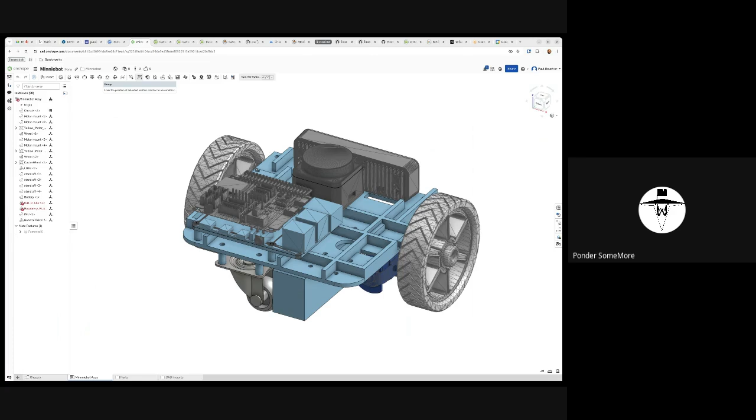Paul, do you have anything to announce about the monthly meeting and voting and all that kind of stuff, or has that already been taken care of? Yeah, sure, thanks Kareem. Yeah, let me do that.

So the DPRG annual... oh yeah, there's lots of stuff there. Okay, thank you, Kareem. My computer is going so slowly at the moment.

So the monthly meeting will be on the 4th Saturday of this month, which is the 25th. So it's not this Saturday, but the following Saturday.

It's the annual members meeting, and it's where we will vote in the board members. We do have a slate of board members. So I'm running again for president. Carl is willing to stand again for vice president. Doug for secretary. Steve for treasurer, and John for librarian.

So the meeting will start at 10 o'clock Central, or 10:15, give or take. And the president for the last year, myself, will give a summary of the things that we did this last year, which was a lot. I was tallying it all up, and we really swung right back into it this past year.

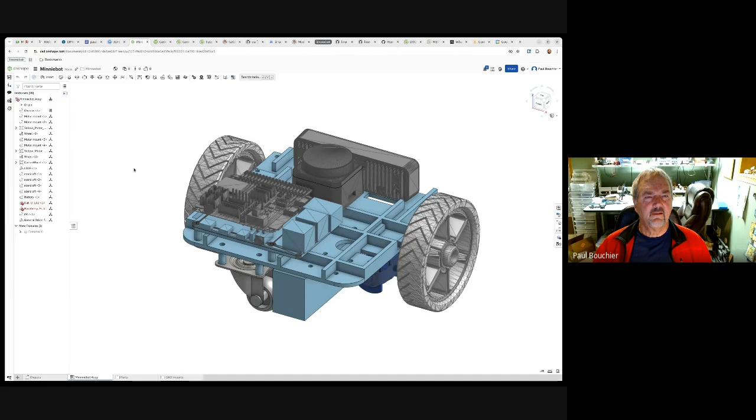Rolling over to Minniebot. Are you all seeing Minniebot here? Yes, seeing your drawing, your model.

I was very fortunate to be the beneficiary of a design review with Doug and Kareem, and they spotted lots of things that I didn't know about and were missing in the design. I've made a bunch of changes since last week, among them putting in a bunch of stiffeners. I think I might have gone a bit overboard here, but it's fairly sturdy, and it's got a Raspberry Pi underneath a Waveshare general driver board for robots.

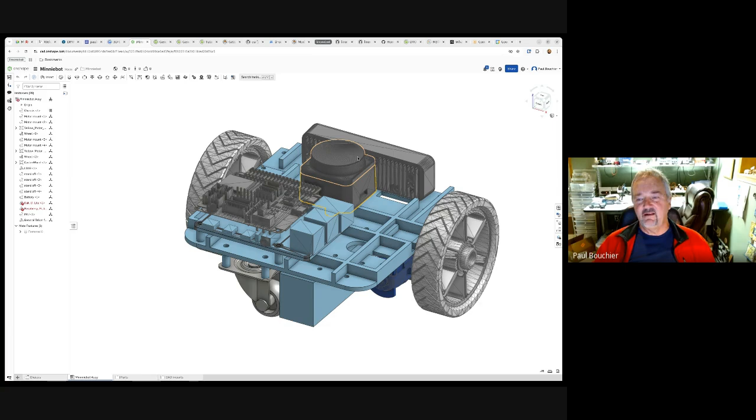It sits behind a spinning LiDAR, which actually doesn't spin on the outside. The spinning bit is inside behind a window, and there's an Oak-D Lite on the front. The big advance for me was - is that a battery box on the bottom? Yep, battery box on the bottom. Good, keep the weight down low.

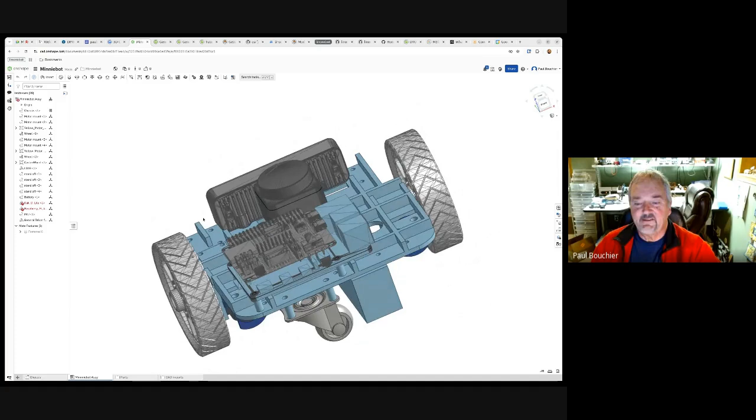Yeah, it's actually got a ton of weight down the back. The caster is actually off-center to make room, because the battery is kind of long, and I couldn't find any other place to put it other than down at the bottom, where it wouldn't impede access to the Raspberry Pi.

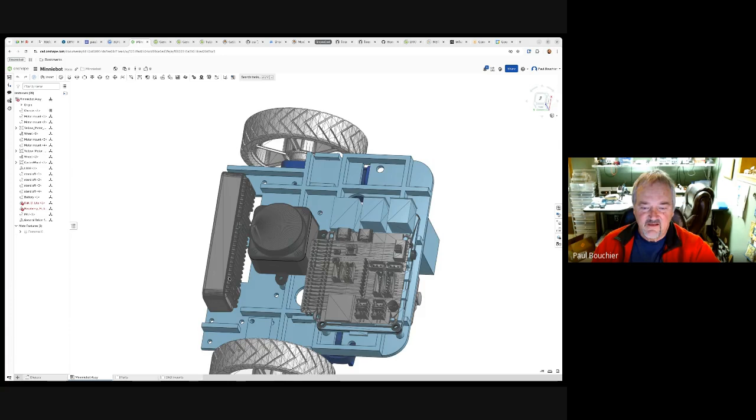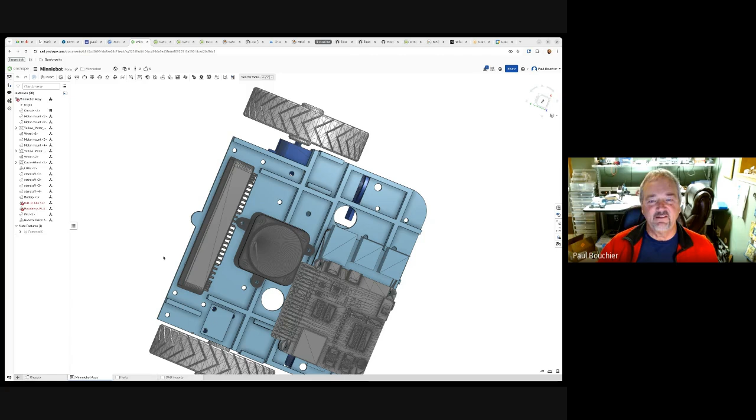And then the IMU is down on the left front, to the left of the LiDAR. Doug had a neat tip - he said put a centering knob on the front, and then you can put different sensor bars or bumpers or other things that would center themselves on that bump. You'd bolt it on here and on a matching hole on the missing panel, because I forgot to extrude this one corner. So yeah, that's that.

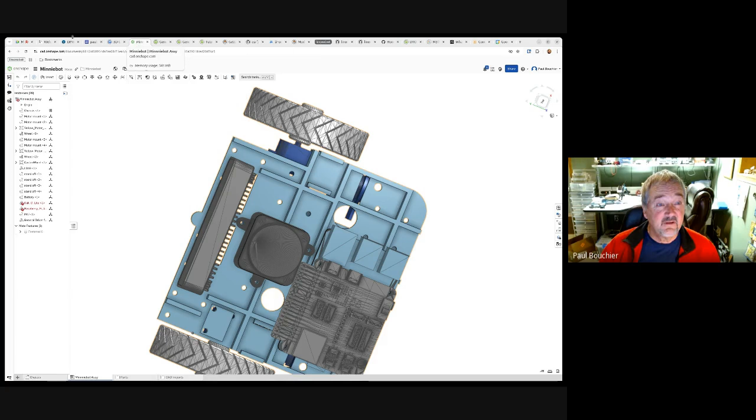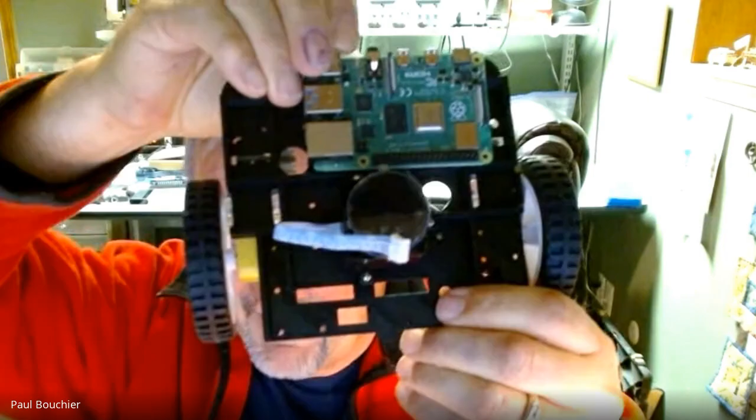So the big excitement is I printed that out and started assembling it. Rapid prototyping, yeah, right. I appreciate your tips on getting all this going, Kareem.

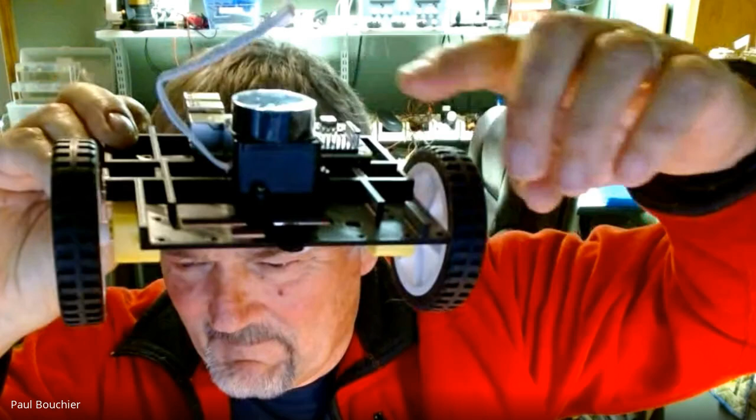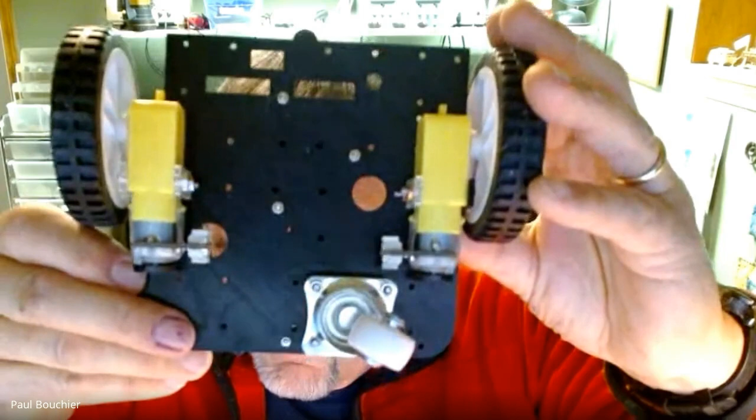And so this is a little LiDAR, a cute little LiDAR, no spinning thing - it's in behind this window. The Raspberry Pi is at the back, and the IMU will go up front here. The OAK-D Lite sits along the front here, and underneath, the battery will sit in this slot down here. So it's coming along, I'm very excited.

The WaveShare controller board arrives tomorrow. So I've had the motors and wheels spinning, and they ran. Hopefully I'll get some more stuff going. I did try to get micro-ROS so that they run.

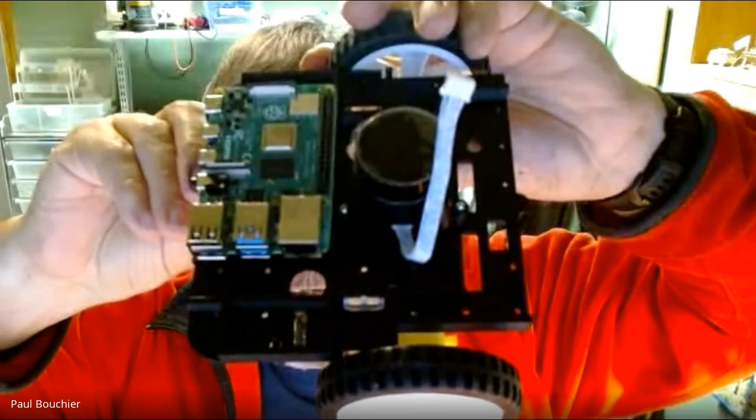This is intended to be part of an instance of Lino Robot. Lino Robot is a micro-ROS based system that runs ROS2 on a Raspberry Pi or a PC, and micro-ROS under Arduino on an ESP32 that sits on top of the Raspberry Pi, and it's supposed to be capable of SLAM. My real major goal here is to get the robot running that stack and able to run SLAM, to where I can make it run around a room or set of rooms and map them, and then use the map to tell it to navigate between rooms.

So it's all fairly black box stuff to me. I hope it's going to work, because I don't really know how to debug this stuff or how it really works in its guts, but we'll see. So that's progress on MiniBot.

If no one has any questions - Tom, do you want to tell us where you've gotten to? Because you've been doing some pretty advanced stuff. So, Paul, are you the one designing just the 3D version, and what about the firmware design?

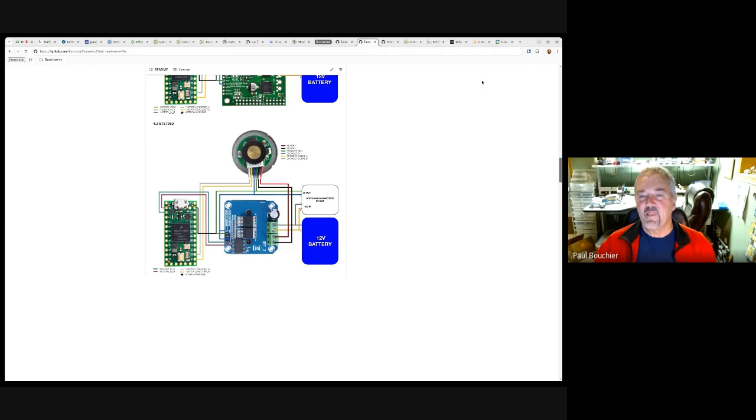The other site, Lino Robot Hardware, is for what runs on the microcontroller. They have a list of supported motor driver types, IMU, and how to wire it. In particular, they only support the Teensy, so a guy called Thomas Chu, who hangs out in the personal robotics Discord server, has ported the Lino Robot hardware repo to support the ESP32. I've been going down through his code.

I was trying this morning to get MicroROS to talk to the MicroROS agent. So he builds the MicroROS agent, then you start it up, and supposedly I got this far. I got the screen output that said the MicroROS agent had started and created a topic and a publisher, and so all of that looked really promising, but I wasn't getting any data out of the nodes. So there's further work to do on that.

He also supports and recommends Jazzy, that's Ubuntu 2404 with ROS2 Jazzy. I'm currently on Ubuntu 2204 with ROS2 Humble, so I might be behind the power curve on this. My hope is to blaze this trail and find out if the documentation is correct, if this stuff really works, and if you can reasonably easily build yourself a little two-wheel robot, such as I've just shown, and have it run around doing SLAM.

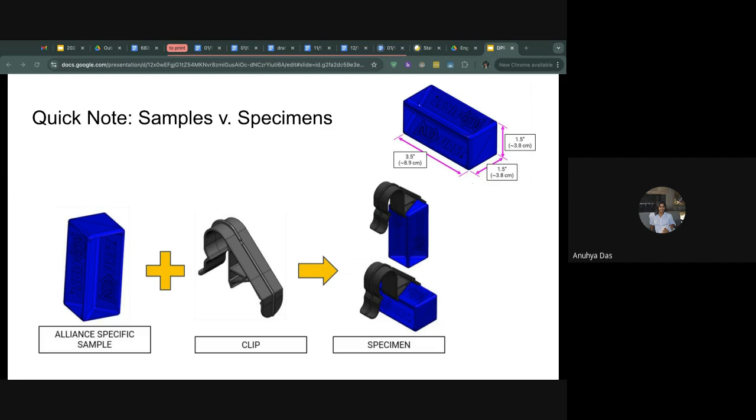One quick nuance is that once a sample has been turned into a specimen, it can no longer be used as a sample. So if a specimen is scored in a basket, it scores 0 points. It's basically a waste of a specimen.

Our goal is to reach in, grab a sample. We are only allowed to control one sample at a time. Grab a sample and then deposit it into the location it needs to go, which is generally going to be the buckets, or we're going to go to the observation zone where human players are waiting, ready for us with a specimen that we can grab with our robot.

That's just a quick game overview, and that's just to explain what the robot we're trying to design this year is for.

Now we're going to move on to our current robot progress. So this is the chassis of our robot from last year, and that has been repurposed for this year, because one of our main goals this year was to get a robot where we could get started with gameplay as soon as possible, since this year's game is significantly more focused on getting points than awards in a way that previous games haven't been.

So this is the chassis we're working with. It was designed for last year's game, which is why it looks kind of bulky. That's something we're trying to work on with the new chassis we're currently designing. However, it's fully functional — it has a Mecanum drivetrain, which our coders are very used to working with, which is one of the pros of having a chassis that's simple like this.

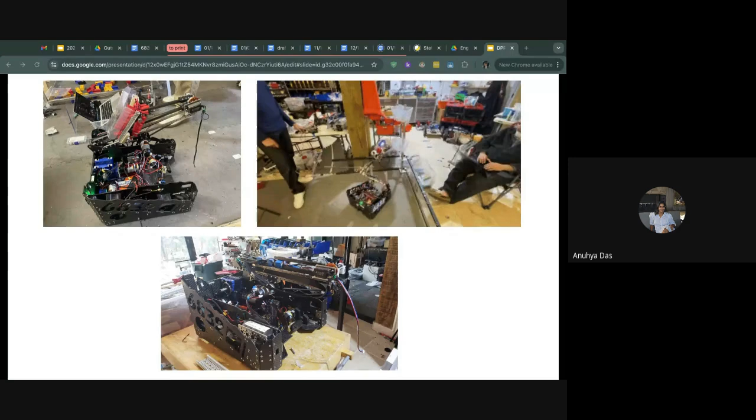And it's very large and bulky, and this is a game where we need to move relatively far. There are movement restrictions placed on us — we can't spread out as wide as we historically have liked to. So having a chassis that's basically built to be pretty stationary, with an arm primarily moving around, isn't the best idea for this year. We want a chassis that can basically zip around, and that's one of the things we're working on.

So this is the intake system, which you can kind of see in that little GIF there — the clear looking thing that's moving. This is how we're intaking samples. We realized that if we wanted to intake properly, we shouldn't just push the samples away from ourselves when we're inside the submersible. We want to pull as many samples towards us as possible. That's where the concept of raking in samples came from.

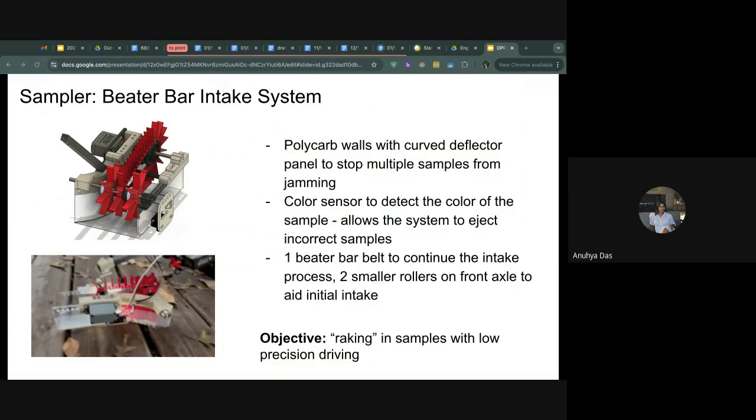Also, I just realized I have my camera off. I'm sorry. That's where the concept of raking in samples comes from.

So the sampler consists of polycarbonate walls with curved deflectors to stop multiple samples from jamming, because one issue we saw is that we were accidentally getting multiple samples stuck at the same time, so we couldn't control either of them, and that also gives us fouls since we're only allowed to control one sample at a time. There's also a color sensor, which allows us to detect which sample we want, because there are three different types of samples: red, blue, which are alliance specific, and a yellow neutral sample. We're trying to avoid capturing the samples of the opposite alliance, because once again, that will get us fouled.

So we started rushing into getting the next iteration of the sampler made. But because of the way it was constructed the first time, gaff tape was the only thing holding it together, and we wanted to get V4 out as soon as possible. That led to us making a lot of mistakes with version 4 of our sampler, because we knew what worked from the previous version, but since we were so busy trying to get a new version out, we kind of ignored all the on-robot testing we should have done.

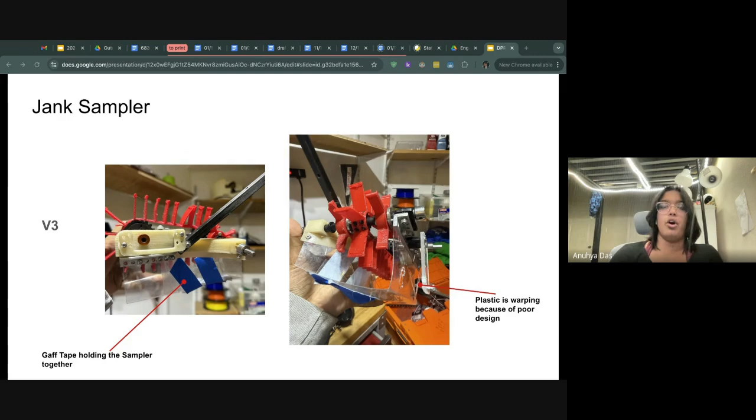Sorry, all the off-robot testing that we should have done. So in the process of making a more functional version, we rushed the assembly, and that led to even more issues in the long run.

Our beater bar was too stiff, so we ended up pushing samples into the ground instead of guiding them with a sampler, because we were having weird temperature issues on our 3D printer. And then the angle connecting the sampler and the carbon fiber tube that you can see there wasn't right.

It wasn't intaking samples properly, and it was putting a lot more stress on our coders. The color sensor was mounted too far from the wall, so once again, not very usable data from that. And the beater belt sprockets were not aligned properly, so they would basically fall off really regularly, making gameplay really unreliable.

So then we had to basically go back to the drawing board, see what we could figure out with this. And we decided to cut notches into the beater bar tines, which you can kind of see in that left picture. That makes them more flexible, so they can guide samples in more easily. So they're not just pushing the samples into the ground, they're actually guiding them into the sampler.

We realigned the color sensor, and we made the standoffs, which were acting as the color sensor mount, slightly shorter, so they were pressed up better against the polycarb. And we couldn't adjust the angle of the CF tube without printing a whole new part, and that's literally hours of printing and then reconstruction. So we decided to let the coders deal with it, basically.

So the lesson we learned was that testing off robots should be prioritized, because it helps us more in the long run, even if it feels like it's going to take more time.

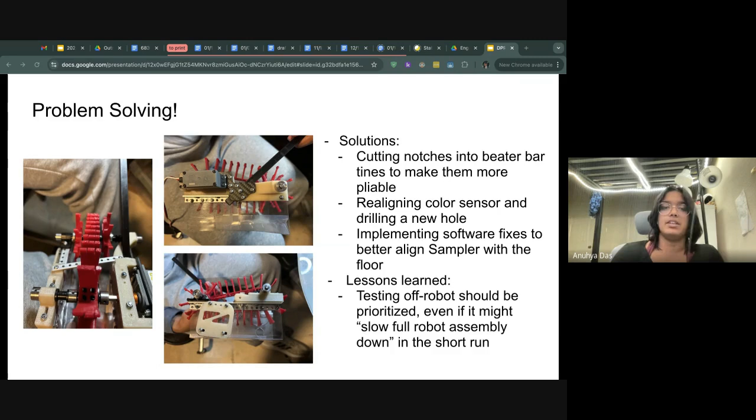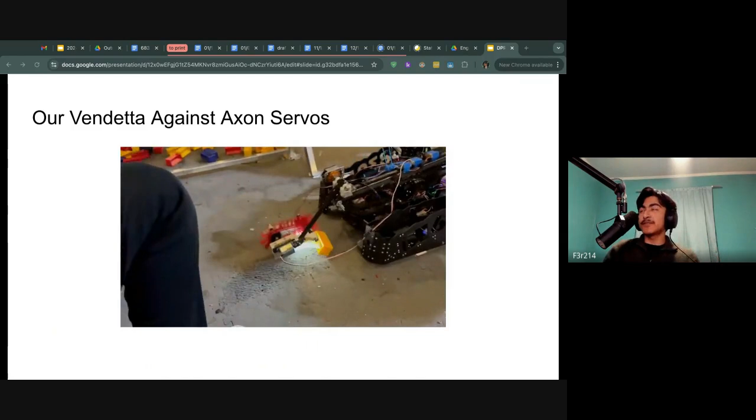Yes, so this is the moment where there's this brand of servos, Axon. They're pretty expensive, but high torque. We have a record of breaking them in past years, and here's the first one we caught live on video. So basically, when the arm was moving back, it got caught on the floor, and then we overstrained it. And there goes, I think, $50.

But an upside to this, those are 85. Expensive servos. 85.

But there was an upside to this. Since we've been very proficient at breaking servos, we've also gotten a little better at fixing our robot. I think this took us 30 minutes to get the servo off and then get a new one back on. And then this is a clip of the arm actually working after a while of it being messed up from all the previous jankiness. So that was pretty cool.

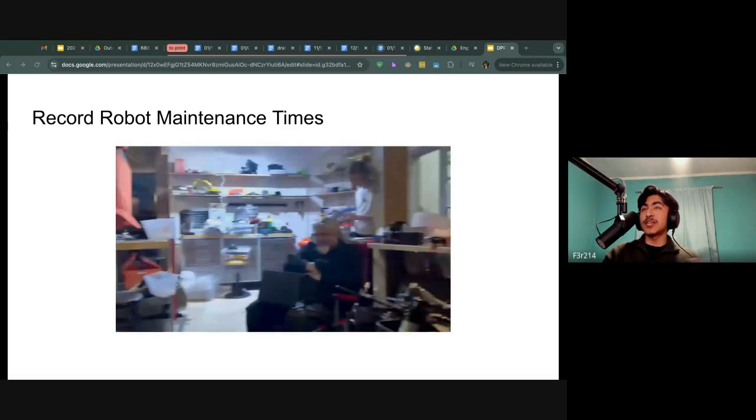And then for our current chassis, right now we have a single arm that is a 2-stage linear slide. I believe it extends to around 3 feet, and it's currently on a worm gear shoulder. However, initially we were planning on doing some kind of coaxial shoulder joint that would allow us to both extend the slides and also raise them up and down.

And then we're planning on adding a second linear slide arm so that we can have both a sampler and then another intake that we've been working on alongside it.

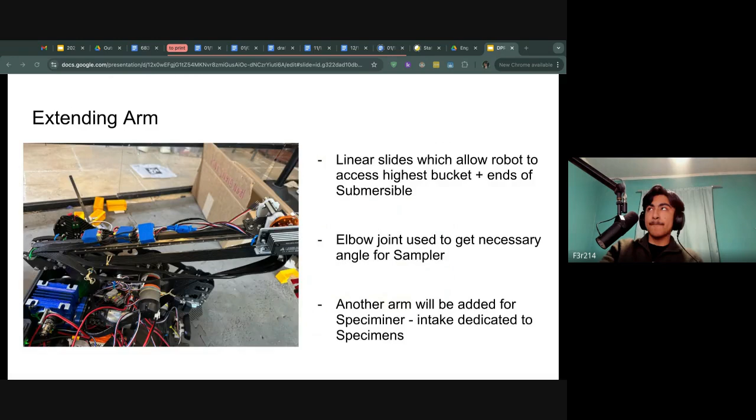And then this is bridge. This is the first version of our shoulder that was supposed to be a temporary fix, but we all know how permanent temporary things are. So we used this for a while. I think we took that to our first meet.

It's using those high beams on the sides. String goes over them, there's pulleys on them, and then goes down to a motor at the bottom where there's 2 spools. And then those strings are attached to our arm from the original chassis to lift it up, and it uses some TPU hinges. So that was nice, but it was still pretty jank and supposed to be temporary.

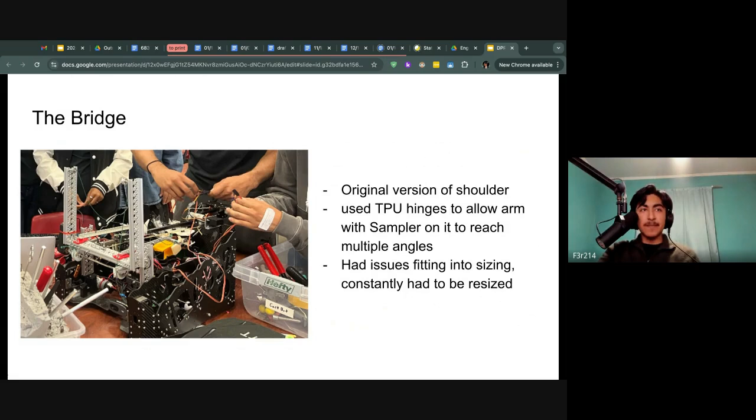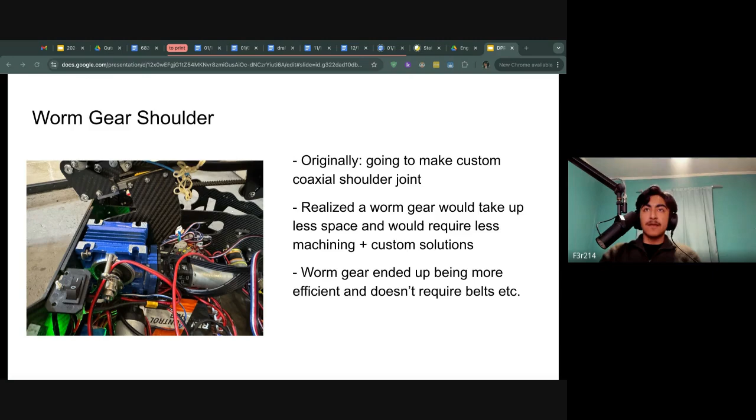This way we can get the actual angle of the arm a lot easier than we would have with something like a coaxial, which has to mess with both the linear slides and the actual pivot of the arm. Plus, it takes up a lot less space.

So, meet overviews. As of now, we've gone to 2 meets. However, we were supposed to have gone to a 3rd one this past Saturday. So here's how we did.

So this was the first meet of the season. We were kind of prepared. We had a consistent auton where we were scoring 1 sample in the low basket, and the mean cycle time for a sample was around 23 seconds.

However, once again, because of coders having a lack of time with the robot, we didn't have that much time to finalize our strategy. The drive team didn't have much time to coordinate previously, and so we made silly mistakes that we shouldn't have been making, especially with so many years of practice. This is when we started realizing we really need to prioritize getting drive practice on our own time, instead of waiting for league meets to provide a reality check.

Unfortunately, in our second meet, it went downhill from there. There was no auton in any match because we had just recently switched to a new arm instead of the bridge you saw earlier. We switched to the worm gear and handed our coder this robot 3 hours before the actual competition and said, code it. That didn't work.

So the robot was essentially a push bot every match because the main arm, which had the main end effector for intake, didn't work. There was also a servo issue where the sampler just wasn't responding to anything. So that was a bit of a problem, and we were just a push bot.

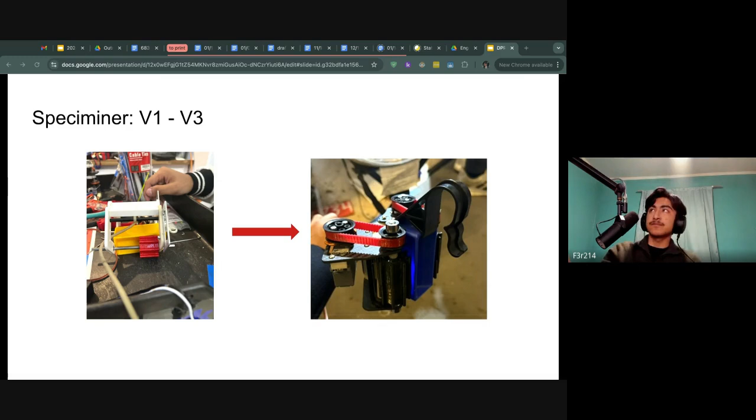So for V1, the proof of concept, we used all PLA parts, so it was pretty flimsy. There was also no physical limits on the claw halves' range of motion. We only had 2 rollers, so there was minimal contact surface, and it was very structurally unstable because it was very much a rush job. This was designed in a few hours and built in a day. For the elastics, since we're closing this with elastic retention, we used surgical tubing, but that proved too weak for our use and it didn't last at all.

For V2, we've upgraded to 4 rollers, so there's a lot better contact between the rollers and the actual block. Helped a lot. We're still using PLA parts, which is unfortunate.

Now we have the servos actually mounted on, but they're weirdly mounted with the aluminum servo brackets, it's a commercial part. And now we've added a large pyramidal structure at the center, so it helps with the aligning, and it also adds some kind of physical limit.

Probably one of the bigger changes was switching to an extension spring, much stronger, and it won't loosen over time as fast as the surgical tubing, plus it added another physical limit to the claw halves.

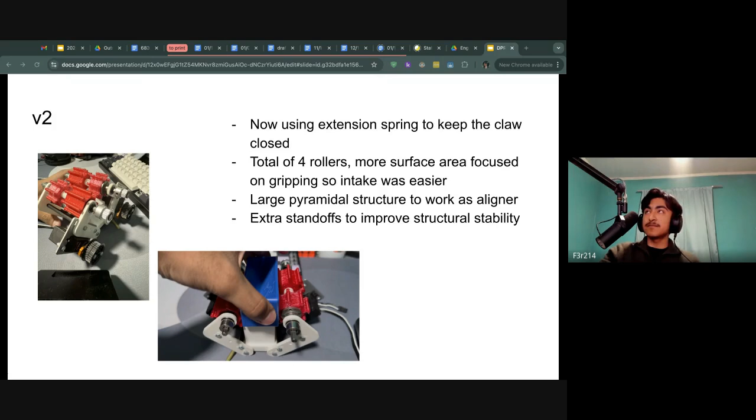Now we're on to V3. We've changed a few things. Now most of our parts, or at least the claw half plates, we've cut them out of carbon fiber, so it's a lot stronger and lighter weight than using those servo brackets, since now they're built into the halves. We've changed to goBILDA super speed servos.

It causes intake and eject to be a lot faster. We're using custom printed TPU belts. This way we can replace them once they loosen, we don't have to go out and buy more or have some kind of tensioner.

We've added a color sensor at the tip of the aligner. This way we can detect what color the sample is if we're choosing to do samples. We dyed our rollers black because they interfered with the color sensor, which we should have probably noticed earlier on, but it took us up to about now to notice.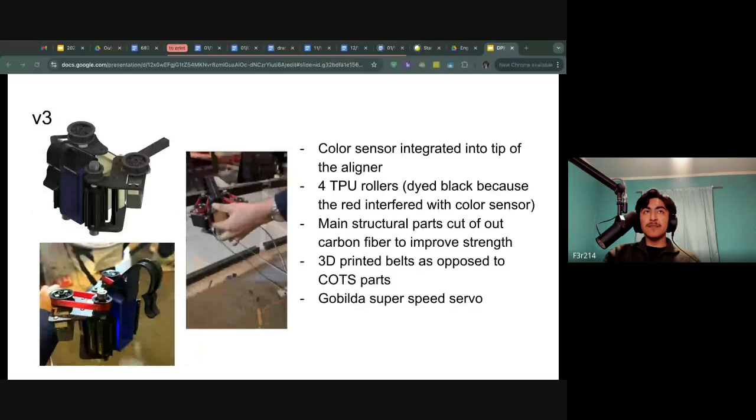The 3D printed parts, they're now being made out of CoPA instead of PLA. So it's pretty good. Now, Speciminer pros and cons.

Pros: your 3D printed materials made out of what? CoPA. It's a type of nylon, it's a blend between nylon 6 and 6.6 from Polymaker.

Okay, thank you. For pros and cons, it can manipulate both samples and specimens, so that's a pro it has over our other intake and a few other intakes that a lot of teams have done. Its intake and eject sequences are pretty fast, and we can automate them thanks to the color sensor embedded in the tip. And I mean, it just looks cool.

It's black TPU and it's carbon fiber.

For cons, it requires extra precision, especially compared to the sampler. It's quite bulky, especially compared to a lot of other intakes that teams have been doing, and we haven't been able to actually properly test it on robot or on a separate kind of testing chassis. We've only been doing tests like this with our hands, so no proper data.

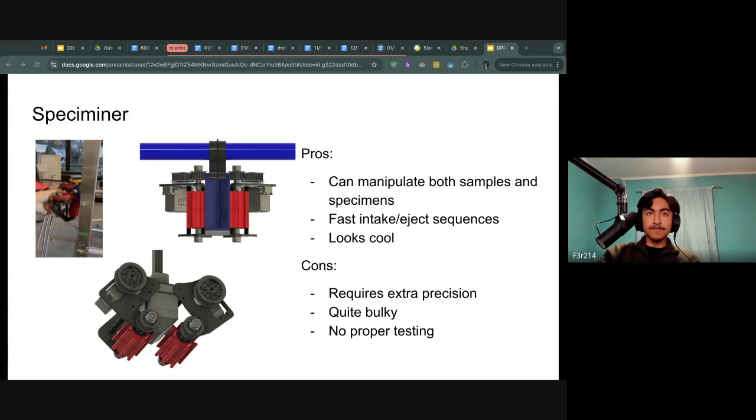Now on to Swerve. I think we went over this during the summer at one point, and we had a test platform at Moonday, but we'll be going over it again a little bit here. We have a custom designed housing for our servo, and then a custom mount plate for our motor. It's been designed to be easily serviceable both on and off robot in case something goes wrong.

We're using a motor to drive the actual wheel, and then we're using a servo to control the yaw of the wheel with the belt.

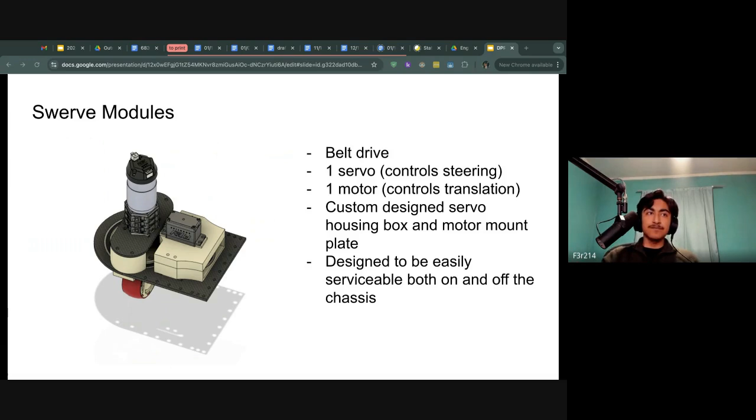Now analyzing our Swerve pros. Just for definitional purposes, Swerve is a standard in FTC and FRC, high school competition worlds, I don't know that it's necessarily a standard name in robotics in general. But basically, the idea is that each wheel can be steered independently, sort of like you see on some of the Mars rover type designs. You need at least two in order to be able to steer a chassis, working against each other, but you can have any number that you want.

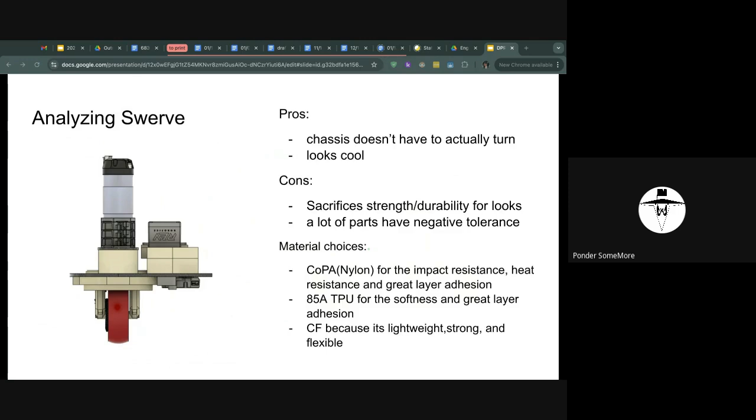About that, Mars rovers, I believe someone at Moonday had a little orange rover that used wheels similar to that, but not exactly since they're driven a little differently.

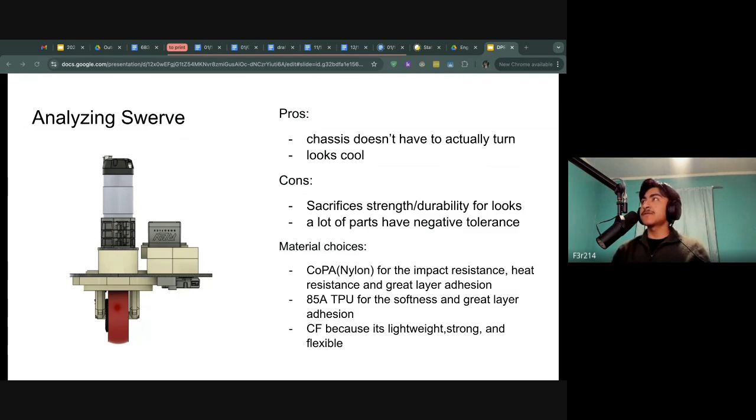Then for analyzing Swerve pros: the chassis doesn't have to actually turn, the wheels do it for it. So you won't see the chassis turn, the wheels do it on their own, and then you can just keep going in that direction. And it looks cool, carbon fiber again, and we're going to be dyeing the nylon red.

Con: this version sacrifices a lot of strength and durability just for looks. So we've been working, or we're going to start working on making it a lot more durable, even if we have to sacrifice those looks.

And most of the parts have negative tolerances or tolerances that are just too tight to be sustainable, so we probably want to change that as soon as possible.

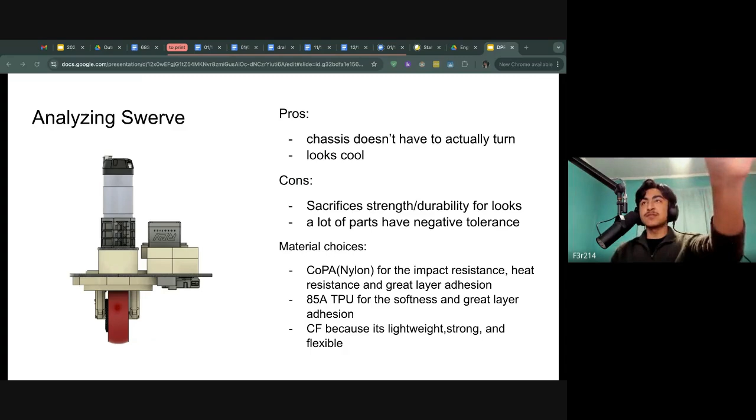Now for our material choices, these also go alongside whatever we chose for speciminer. CoPA, all these tan colored 3D printed pieces you see, those are made of CoPA nylon. We chose it for the great impact resistance, heat resistance, and layer adhesion it offers. We are using 85A Ninja Flex TPU for its softness, great layer adhesion, and it works pretty well for wheels. Then the carbon fiber, obviously for its lightweight, strength, and flexibility. Plus, it looks really cool.

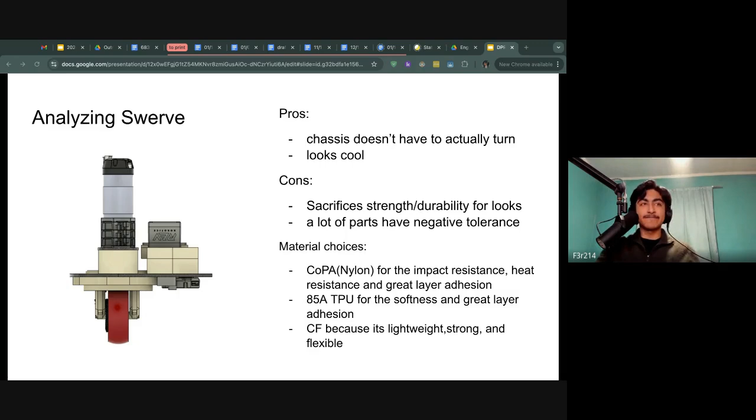So it consists of a giant 4mm thick carbon fiber plate, the two swerve modules that Fern was talking about a moment ago, a servo power module, a goBILDA Pinpoint odometry computer, and two sets of odo pods under the robot and a pair of Omni wheels.

Additionally, we want to keep the swerves as far apart as possible because that's just how they work the most efficiently, but we didn't want to make the robot off balance. And because of how heavy the back end is, we added the battery mount at the front because we're also going to add the whole shoulder assembly at the back.

However, one of the problems we foresee is a balance issue. Like with the current robot chassis that we've already seen, that's already pretty heavy. But we've seen that if there's acceleration when the linear slides are being raised, it will almost start to topple over. And we're trying to make this relatively lightweight, so we're really hoping we can figure out a way to combat that, but we're not 100% sure.

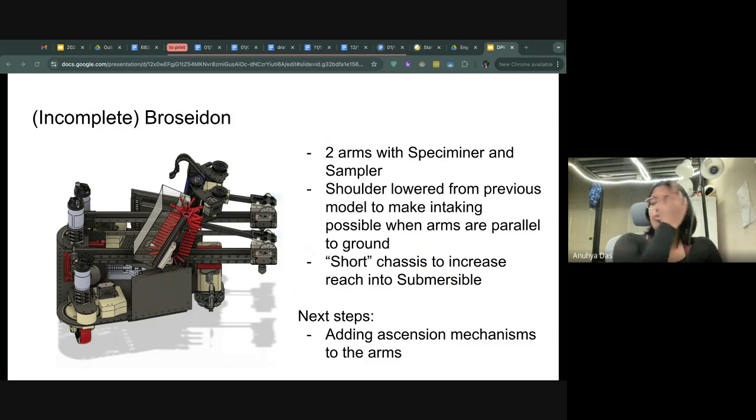And we're probably going to add some copier guides alongside the Omni wheels and alongside the odo pods, so nothing actually gets caught up there, because our main priority is avoiding penalties.

Some of the next steps we have are just getting that time management figured out, making sure we have that sense of urgency, because we don't have that reality check of the league meet anymore. I didn't explain this earlier.

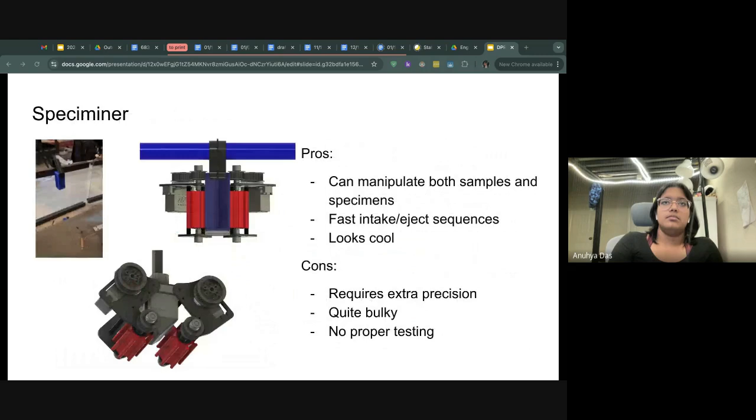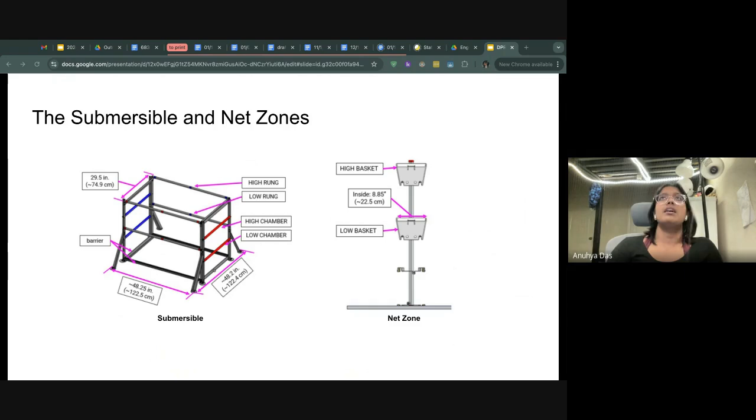However, there's a slight caveat: to be on the high rung, you have to have gotten there without initiating contact while already off the ground. So the first place your mind goes, if you're not Mr. V who immediately thinks of a jumping robot, is climbing the rungs.

That's something we're still trying to ideate and figure out. We have an idea, but we haven't done testing yet because we still don't have a robot with two arms on it. These are all things we're trying to figure out. If y'all have any advice that could pertain to us, that would be incredible.

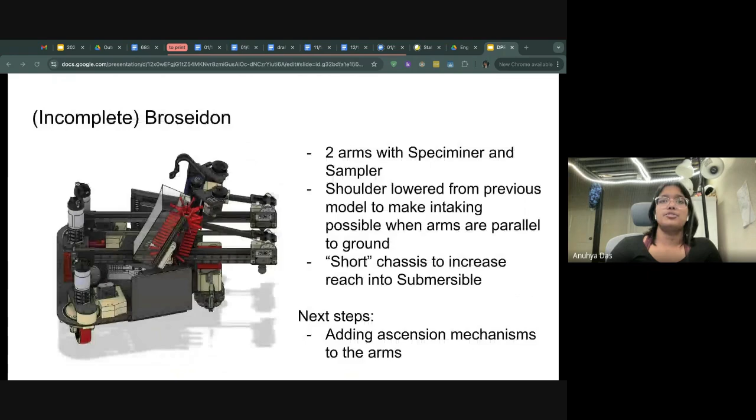I also want to show you what I was talking about with that tipping problem. This is kind of what the robot will look like when the arms have been raised. This is without the arms extended at all. Each of the arms has a 2-stage linear slide and then that elbow portion. This is what we're working with, and these are some of the problems we're trying to figure out. Thank you.

Wow. Yeah, make it jump. You guys have some challenges.

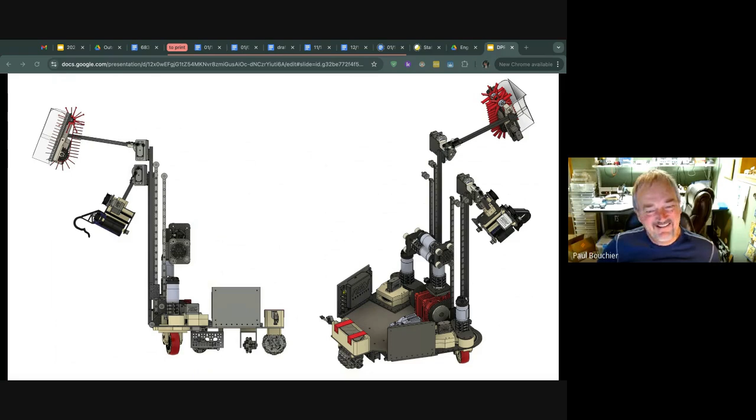So when you're going to have it—didn't you, one year or another, have one that would pull up, literally pull itself with a rope up to the top of whatever the tower was? I keep thinking when you say you have to get extra points to get the robot on the top rung—so how are you going to achieve that? Or have you even thought about doing that?

So in the past, last year, we had a mechanism where we just ran into the rungs full speed, and then we had a locking mechanism that would passively grip onto the rung, and then we'd pull ourselves up.

However, because there is a high rung here, currently what we're thinking is that both of the arms are rotated by the same motor, so they rotate with each other. However, extension is controlled by two separate motors. So something we're potentially thinking about doing is adding a small plate to the bottom of the chassis, to the back of the chassis, so it automatically straightens itself on the base of the submersible.

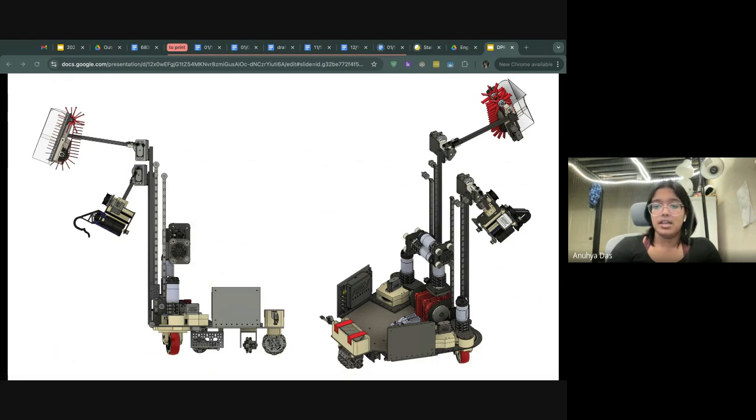And we're going to extend one arm, which will hook onto the low rung. Our belting system is very, very strong—it can sustain a solid amount of weight. We are going to extend the secondary arm and allow that to pull itself up to the high rung as we'll be off the ground. So that is one of the ideas we are conceptualizing right now.

However, if y'all have suggestions, we are so open to them.

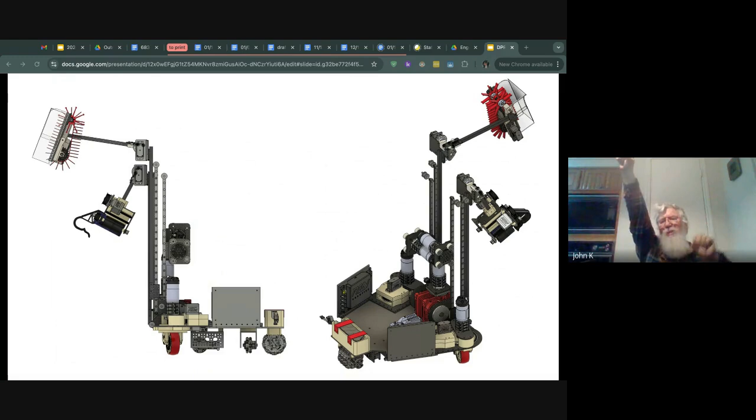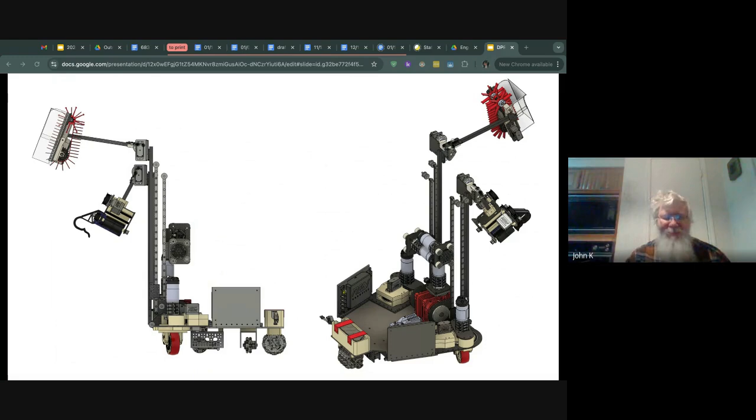So you have the one arm grab, and then the other arm grab. Then the second arm release—can't grab until the first arm has gotten the robot at least entirely off the ground. Okay, so then it gets up there. Then you reach out for the next one, let go of this, and pull it up the next one, or else release and pull both down. Okay, would be my thought. Something along those lines. Yeah, it sounds like it would be feasible.

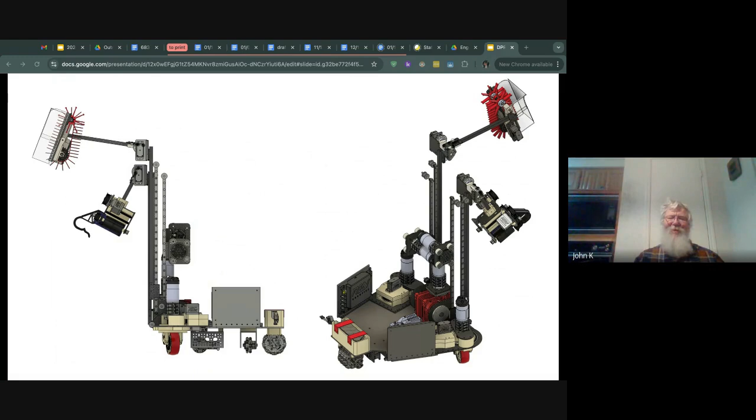To get the high rung, you also have to have no contact with the low rung either—you have to be completely above it and into kind of the airspace of the high rung, I'd say, to get those additional points. It's complex, and it's not something a lot of people have achieved so far. I was going to say, it's the rate, pull factor, when to grab, basically, or hook.

I'm curious—once you've started to lift your robot off the ground, how do you maintain the orientation of the robot in terms of knowing where it is, knowing its pose?

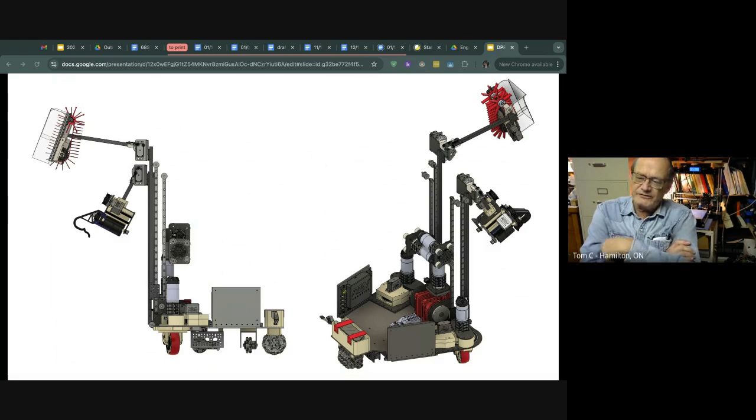It must no longer be level, for example. It's practically swinging, so it's dangling. It's perpetually dangling.

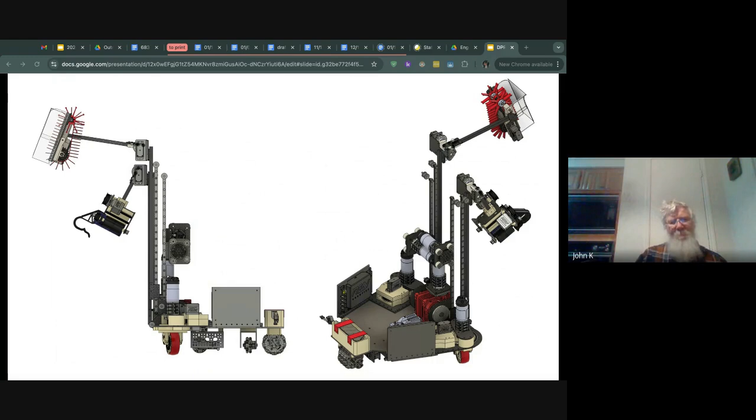The caveat about getting the high rung is that you just need to be off the ground. So if there's a way for you to maintain your position for that inch and a half when you get off the ground, and you can maintain that completely vertical position where the base of your chassis is parallel to the ground, that's the point from where you extend your second arm up. We're thinking that's going to allow us to remain vertical for enough time to initiate contact with the high rung and just pull ourselves up from there.

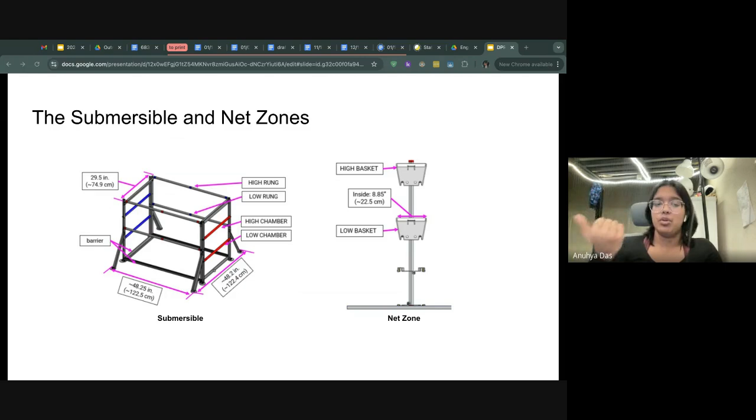That's good. That entire time, the back of those slides is in contact with the lower rung as well, so it's enforcing the verticality, or parallel to the ground condition, all the way up until you get higher than that rung. And then it doesn't matter, as long as you don't let go of the bar, right?

Because then you can swing. Your robot will want to swing inside, but that's allowed by the rules, as long as it doesn't let go, which a lot of teams have done. That's one of the failure modes. But they know how to create latching claws and things like that, so that's probably what they're going to do.

They do have the ability to detect their orientation anyhow, because they have multiple IMUs on board.

So I assume the latching thing would be sort of like a pincher-like thing. Is it like a ratchet and pawl kind of thing? So they've created a locking mechanism, like they used last year. It's actually sitting in a box downstairs, so they can use that again.

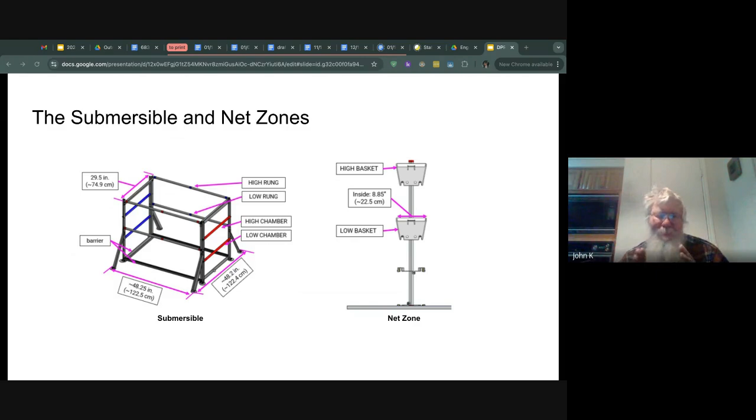So you're going to have two basic arms. Where does it sample the block? I don't understand this picking up the block, how you're going to do it effectively. You have a sampler chute kind of thing, so how does that fully work? Is it that you push one into the sampler, and only one can be in the sampler at a given time? Only one sample or specimen can be in contact with the robot at a given time.

But there are fine points to that. However, at the league meets we've been attending, judges haven't been adhering to that. Technically, you're allowed to have contact for up to 3 seconds with two, just because you're in a submersible where you're literally digging through a pile of samples. So you're allowed contact with two for up to 3 seconds, just because of how the game is set up.

However, you're not allowed to have two in your robot or in control of your robot. It can't be in the machine or grabbed by the machine. Effectively, no. So something which happens sadly often is one of the problems we were having with the old sampler.

With V3 of the sampler, the belts were so loose that they couldn't maintain their grip on the samples well enough, so they accidentally dislodged within our robot. And if they dislodge within the robot, there's absolutely no way to get it out of the robot, and then you're essentially useless for the rest of the game because you cannot do anything.

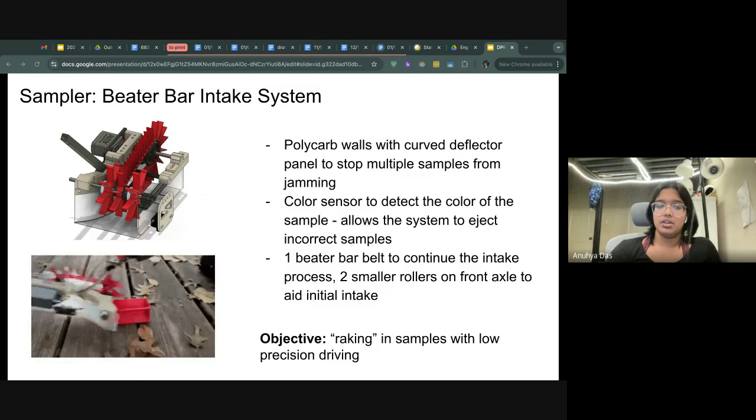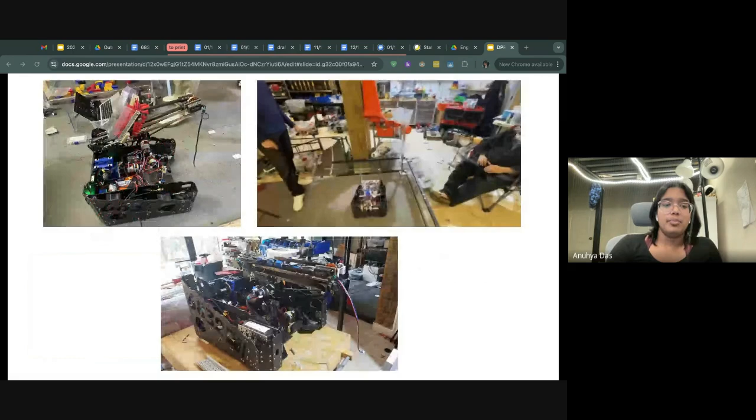But if it continues to occur with this version of the sampler, we're going to have to look into other solutions, or figure out a way to have it basically spit it out or kick it out. A reversal type thing would be my thought. It's not an issue when it's inside the sampler. However, if you look at the robot itself, there are plenty of places where a sample could accidentally fall in and then get stuck, and we can't control that much area.

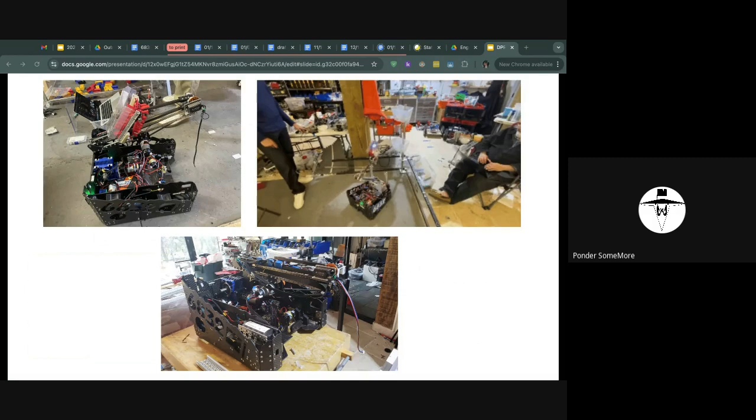But yeah, you were saying basically building shields around the motors and stuff, the reels, right? Yeah, you can build a top cover or something. But it's got a lot of interactions it's got to avoid with those arms and such. I know, that's why I'm like, yeah.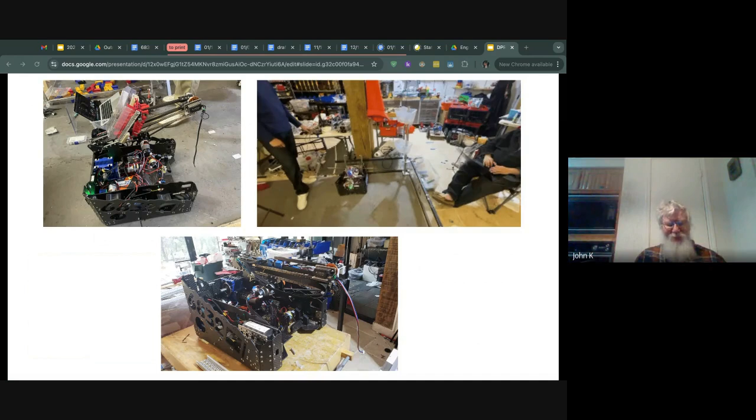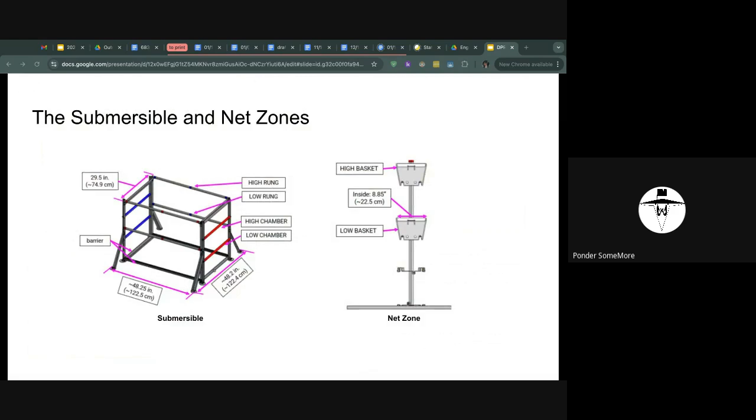You don't have a picture of the actual area where you go into the sub? It sounds like just a pile of samples, and you have to sort of dive into it. Do you have a picture of the loaded sub? I can, it's kind of... you can sort of see that. See how many all of those little rectangles in there? Those are all samples, so the sub is completely full of those things. So you drive into the pile trying to figure out which color you want most of.

You drive up to the barriers, essentially, which is a barrier. You're not allowed to drive into it. Okay, good, that solves some of the problem. I was wondering how you only touch one. To answer that, okay.

So your sampler is basically a tube that hovers over one of them and spits it out or gets it. Yeah, okay, and contact is much more forgiving. They allow more contact inside the sub, so if you hit a few, that's fine. But you cannot pull your opposing alliance's color out, that would be a foul.

So that's why they have a color sensor on it. What it basically does is it keeps ejecting it in the same direction that it's pulling it in, or the opposite of it. So it ends up leaving the samples that it's okay to temporarily pull in an opposing alliance sample, because we don't have any control over that process, right? But the color sensor detects it's the wrong one, and it just keeps that belt running and ejects it. It doesn't stop it, it spits it out. Okay, and it leaves it pretty much where it started, just aligned differently.

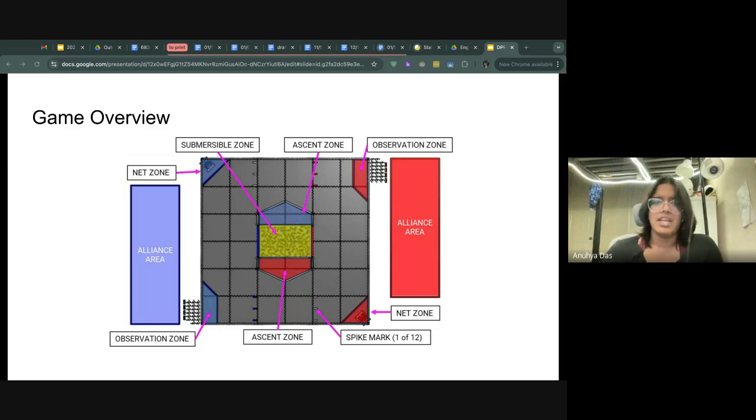So if it goes the way we hope it does - expecting is far out of the question - then we're going to try to fill up the high basket, which you can do with around 15 samples. And then we go for specimens, unless we've seen actual data that specimens are faster, because specimens get you 2 extra points comparatively.

The reason you have to do both is because you don't know who you're going to be paired with - your alliance partner may only be able to do one or the other. And to maximize your score, you want to be the team that can do either. You can't add to the value. There's a lot of congestion in the way these challenges are designed if you try to do both do the same thing.

Interesting, it sounds like definitely an interesting year compared to the other years. Wow, I take my hat off to you folks. Absolutely, challenges - they come up with some interesting challenges.

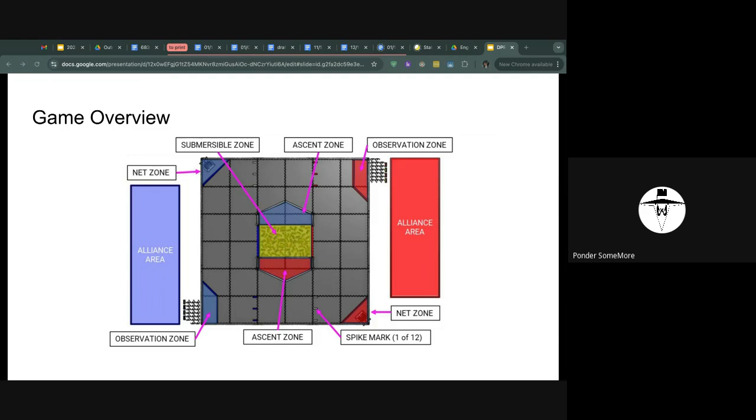Well, thanks for your input, guys. Thank you for showing us what you're working on. Sounds like you've all planned well, and I really can't see too much improvement needed. It sounds like you may want to look at your sampler and the walls so it doesn't bulge or kick out.

I just want to be able to run my robot in a straight line. Right, Michael? One of our challenges looks trivial compared to what these folks are doing.

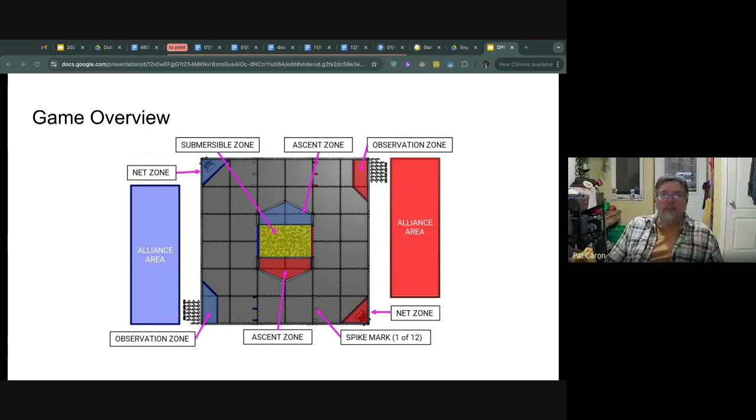Are you around and available, Mike? Yeah, I'm here in the space. We're finishing up some tech cleanup, about 8 hours of it, so the next show should be even cleaner than what we had before.

Can you hear me? Yeah, yes. Was Elm there tonight? Oh no, this is just tech, no actors, they're too distracting. Yeah, they want all the attention, and we needed time to ourselves. One of the actors is one of my students. Oh yeah, she's great.

And she does it quite a few times, so she must have built up good muscles, because that's like 16, 18 feet in the air. So that's the thing where they roll themselves up in it, to ascend. So that's one thing that happens on the side.

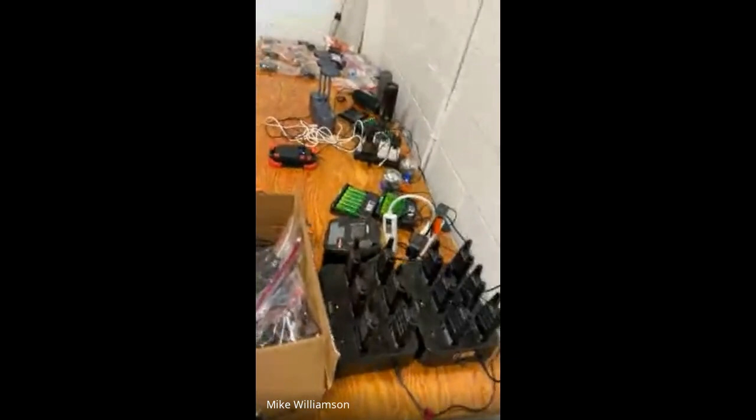So I'll go into the back room here where we charge up everything. Let there be light. And so this is my charging table here. So we got walkie-talkies, and then some big batteries for some balls, and these are the ball robots right here charging up.

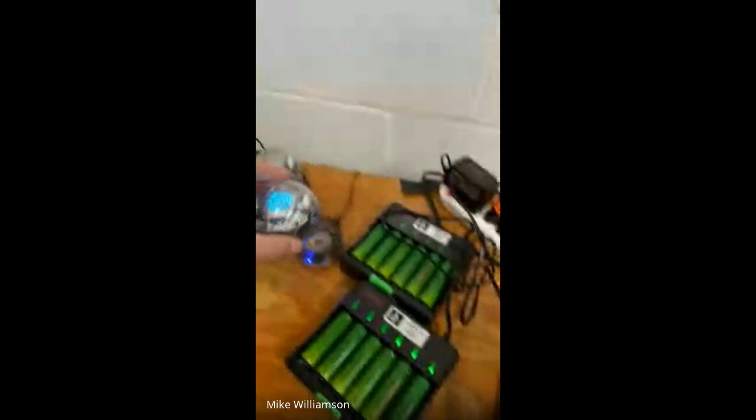And then we have a bunch of batteries and chargers here, and then our wireless equipment are these with their microphones and everything. And then the soccer ball. Let me see, open up the soccer ball container.

Yeah, so they are acrylic balls that were painted, and then we put them together and put the ball inside of it to make it run. It's been running pretty well - I think I demonstrated it once or twice at the place at our live shows, but everything's working. It can always be better though.

So awesome Mike, I'm really looking forward to seeing this. You're having it Sunday at 4, and you can get tickets online or at the door. I posted the link for tickets at the beginning of the chat - it has a map of Fair Park, so it shows you exactly where it's at. If anybody on this call is a senior, you can get a discount, either at the door or online.

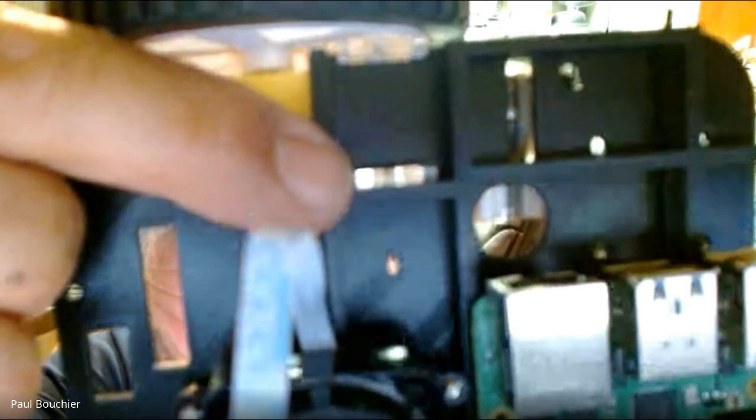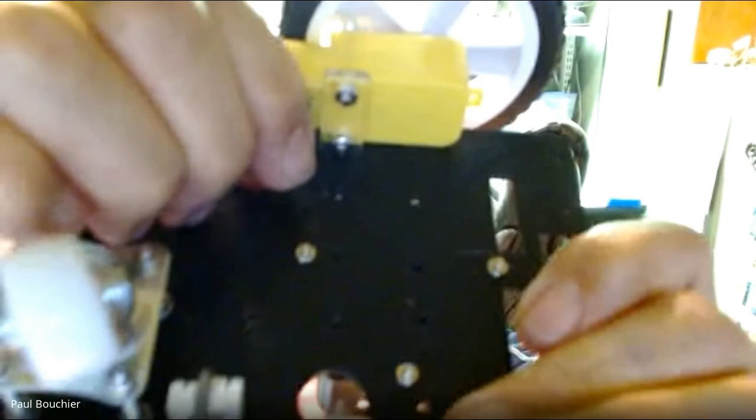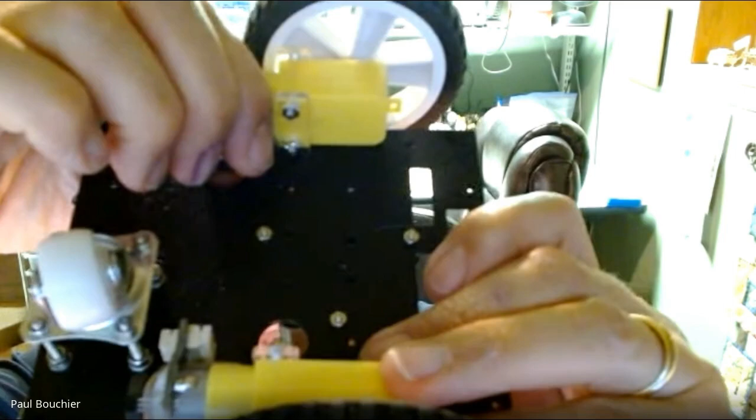holes that are cut in the chassis. So let's see if I can point them out. These holes, there's a little acrylic thing here, but when I printed out the motor mount, I'll show the other side of it. When I printed out the motor mount, which I designed and 3D printed, I designed it to be about 0.2 millimeters smaller than the width of the slot that it fits through. It didn't fit, it was about 0.2 millimeters too wide. So that's more of a...

Lost a bunch of people. Oh yeah, or not, they will hopefully rejoin. So Kareem, you were about to say something about my slot size versus the motor mount size and shrinkage.

I sort of see PLA as fairly dimensionally stable. What you may have is, I don't know if you've compared it versus metrics. What tends to happen is the travel in either the X or Y direction for your printer may need to be recalibrated, that's one thing. The other is that different slicers will handle internal voids differently. So you're talking about a slot, right? Yeah, which is similar to the hole problem, right?

So some slicers will end up crowding it, so there's more material there than accounted for, resulting in actually smaller slots or holes than you specify in the dimensions. One of our standard processes is we always have to redesign for manufacturability, whether we're doing CNC or carbon fiber, since we know carbon fiber will relax a little bit and then come back into the hole after the cut.

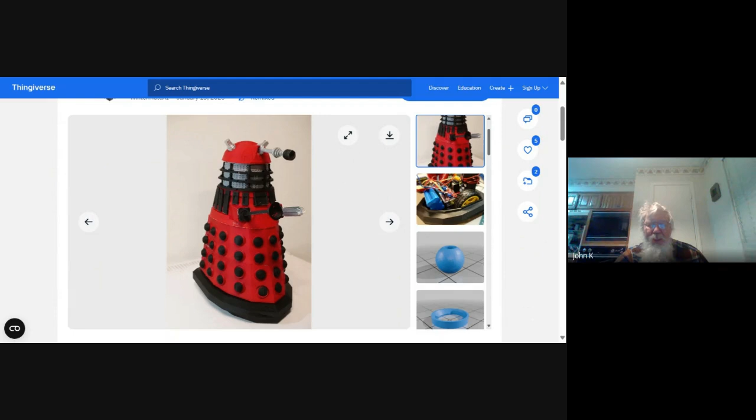And let's see, stop share. Okay, so that covers that. And I don't know if there are or not - I saw that Dalek thing that they can put on their robot if they wanted to. It's on Thingiverse, I'll just put it in the chat in case they wanted that. But they probably have a plate for their robot already, is my guess.

Beyond that, I don't really have very much else at this stage.

Hey Paul, like they were saying about your 3D printer parts, you can just do a sample and then see if it fits. But like when you're doing little holes like this or whatever, sometimes they're too small. Normally mine prints too small for holes, so you oversize them in the CAD when you're drawing them up. It's 3 millimeter, like the one guy said, 3 millimeter - you might want to write it in your modeler as 3.5 or 3.2 or something.

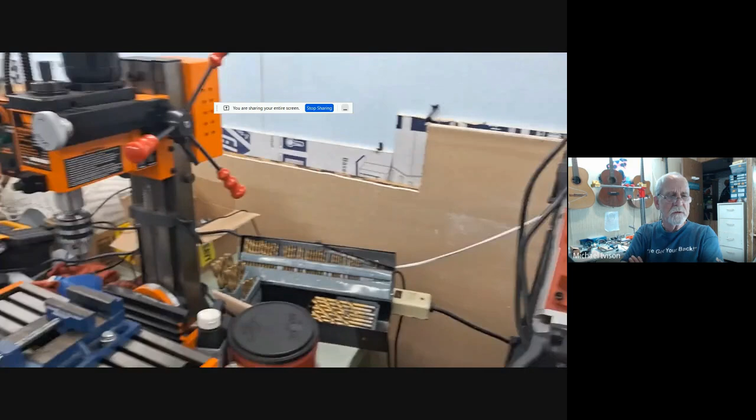I'm going to show you all a scan of my little shop. Let me do a scan. There's a belt sander, there's a bandsaw, there's my milling machine. I know it's still a mess, but I'm just now getting back into the energy to do something. There's a work table that's dirty right now but I can clean it off. My computer chair for sitting down a lot. There's some shelves and more shelves. There's my welding table. I'll be cleaning this up pretty soon. I finally got some energy to start doing stuff after a few weeks, a couple months of R&R. All right, I'm done.

Let me unpresent, stop presenting, there we go. Uh-oh, we got other junk going on here. But that's what I got, and I have a lot of fun with it.